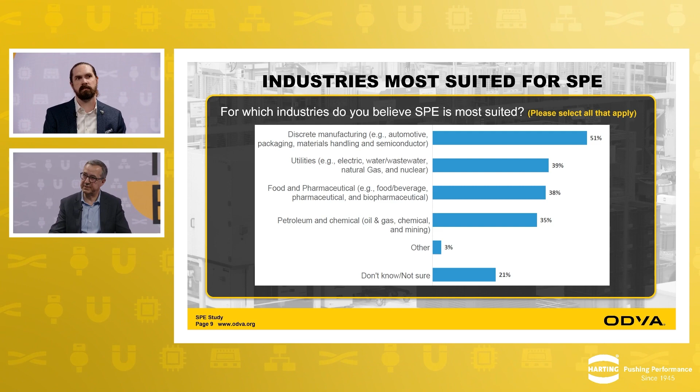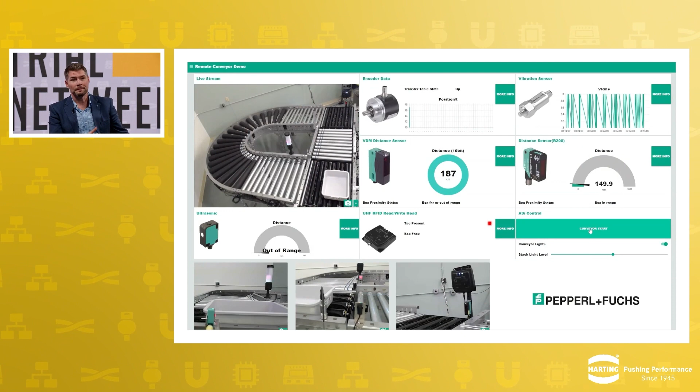And then what we think is, okay, instead of letting the data go from this to wherever data goes after it's used, why not take that to an event database and train a generative AI on this, and start teaching it the patterns?

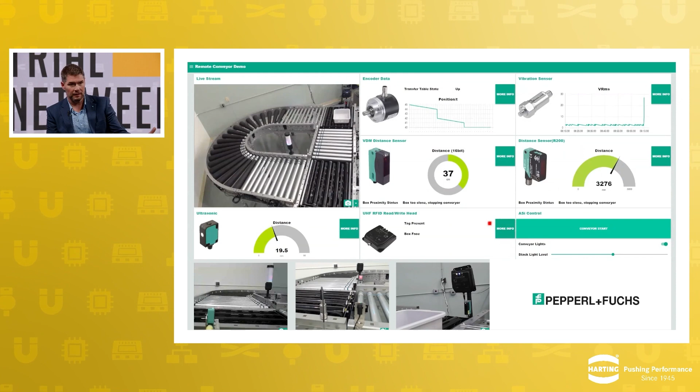You have all this anyway. You can keep the dashboard, let that reside with the operator. But now you've got an event database to learn from.

I want to add on to this, touching on the different user personas you folks talked about, the 3 a.m. stories we constantly hear about. Now that you have this application, the ability to remotely monitor what's going on using AI and machine learning to identify all the different patterns, going back to the original example, you can easily utilize all the different data.

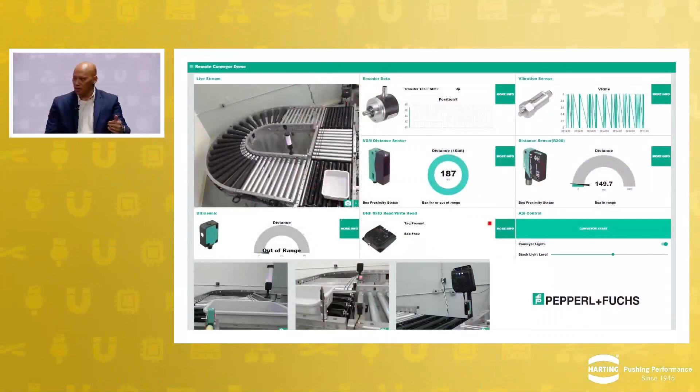Vibration, want to bring it back to basic, or even the photo eyes. Are the photo eyes properly lined up? Because in previous years, you have operators constantly looking at it, like, okay, what's going on here?

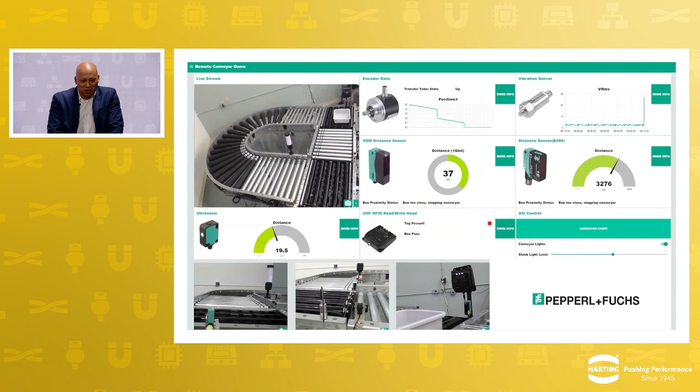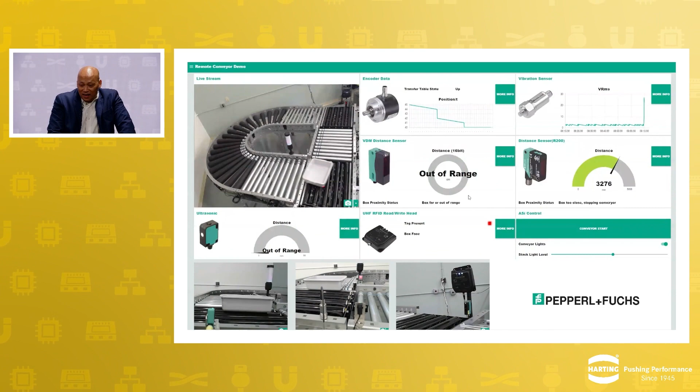I want to bring it back to the labor shortages today and how this could impact it. I had the privilege of talking with a plant manager for the 3rd largest waste management company in the US. Because they couldn't get people to monitor those conveyors anymore, he basically said, do you know anyone that could potentially babysit my conveyor? I will train them, I will pay them up to $70K per year just to do that basic function.

But to RC's point, now if you have this intelligence, you see the different patterns and you set yourself the acceptable alignment, you no longer need to have that. You could deploy that operator into something a little more challenging, something more beneficial, taking it back to the lack of resources. That's huge, right? Because now you're becoming a little bit smarter.

And to Amanda's point, as far as predictive maintenance is concerned, if you do have that pattern, you no longer have to worry about that 3 a.m. call.

I'm reminded of a comment Amanda's colleague Bill made yesterday during the session, an example of a sensor monitoring a motor's current. That motor, if it hits 900K cycles and it's predicting based on past failures that it's going to fail around 1 million, can start its own work order and put that ticket out in advance to bring the person to the work with that kind of intelligence. Hearing a story like that kind of brings it to life for me.